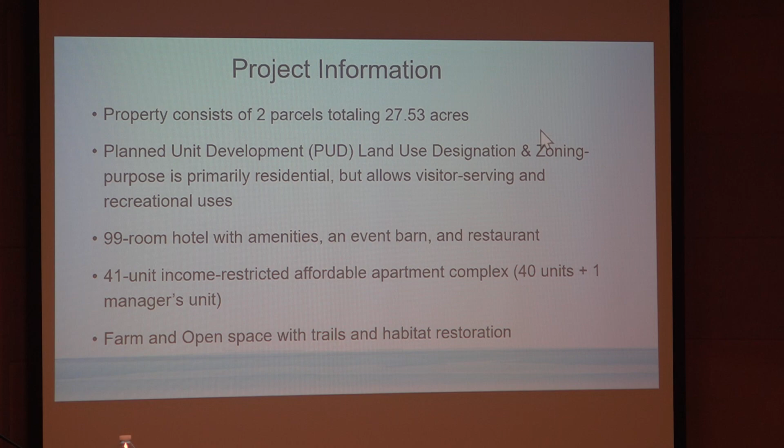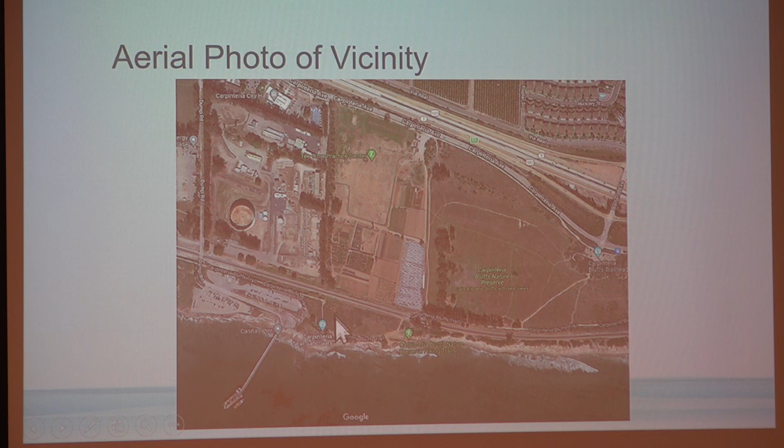Here's the aerial photo of the project site. This is the property right here. It consists of the northern parcel, 23.4 acres, and the southern parcel down here, 4.13 acres. Right here's where Tee Time is currently. These are the agricultural fields back here at the organic farm. Over here is the Chevron property that's in the process of getting permits to go through decommissioning.

Here's City Hall, where we all are right now. Over here is the Bluffs Preserve, and the 101 and Carpinteria Avenue, and obviously the Pacific Ocean.

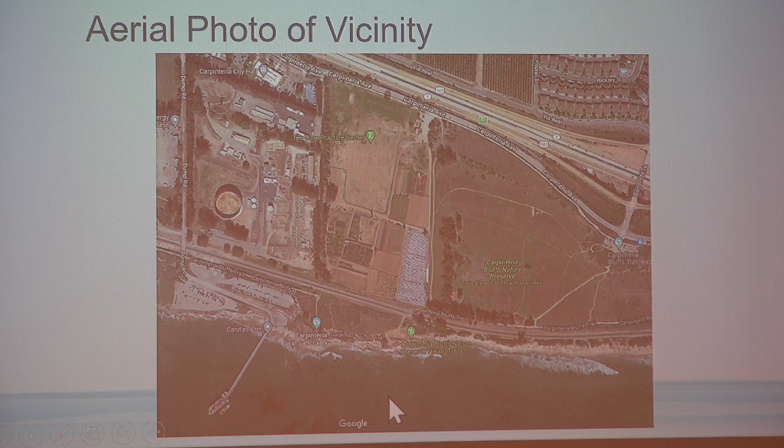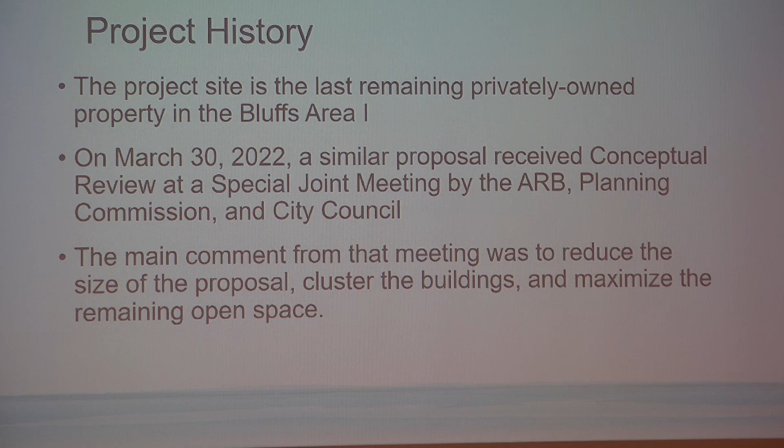So the project history is that this project site is the last remaining privately owned property that's part of the Bluffs 1 area. On March 30th, 2022, a similar proposal received conceptual review at a special joint meeting by the Architectural Review Board, the Planning Commission, and the City Council. At that meeting, the main comment from all the decision makers was to reduce the size of the proposal, cluster the buildings, and maximize the remaining open space.

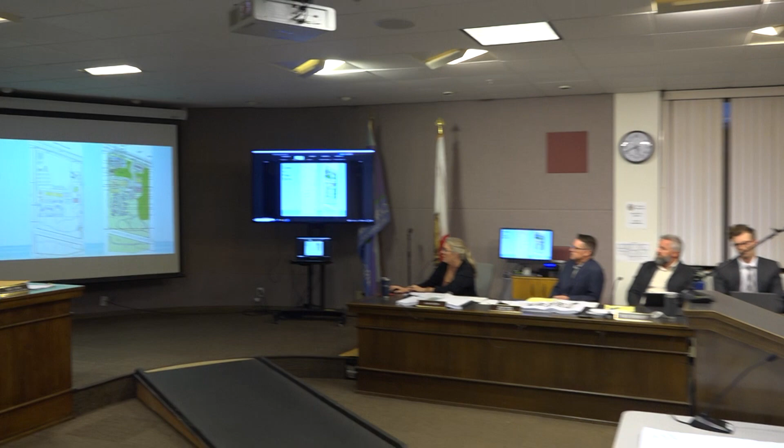So here's a site plan from the concept proposal versus tonight's proposal. This on the left-hand side is the concept proposal, and this is tonight's proposal. This is the hotel resort component here in the conceptual; now the resort component is here. The parking lot used to be here; now the parking lot's here, closer to Carpinteria Avenue.

The residential component was originally 16 units in the first proposal. Now it's 40 units with the manager's unit for a total of 41. The original proposal had a farm here with above-ground parking, and now they've got the farm in this little area, with a subterranean or underground parking garage in this area instead of surface parking up here for the resort. I'll go into more detail on all these components in just a minute, but just for comparison, this is the concept, and this is tonight's proposal.

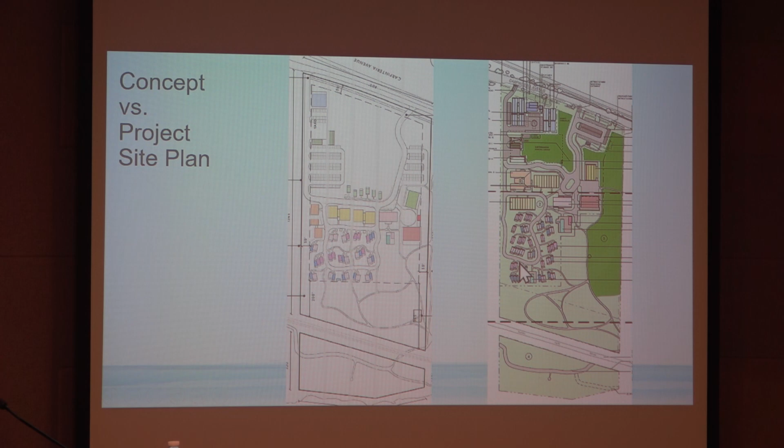And here's the actual project site plan for tonight. I had to turn it the other way to make it big enough to look at. This is the 101 over here and Carpinteria Avenue, so north would be on the right-hand side of the page, and south and the Pacific Ocean are on the left-hand side. So this is the residential component here.

It would be two apartment buildings with a community center, with the manager's unit up above and a little maintenance building here. The apartments would be accessed from Carpinteria Avenue via this access road, which is also the service road for the resort. Here is the underground footprint of the underground parking garage.

This is a barn for the agricultural operations. This is the hotel maintenance building.

And then this is the spa, which will be bermed to appear as one story, with a green roof. And then the two hotel lodges, this one would have 40 rooms, this one would have 39.

Here's the bungalows here. This is the main hotel building, where you go to check in, the concierge and things like that. The swimming pool or the pool cabana. And then this is the restaurant that would be open to the public.

And this is the events barn that would be for resort events, weddings, and special events, and also available to the community, proposed right now at six events per year.

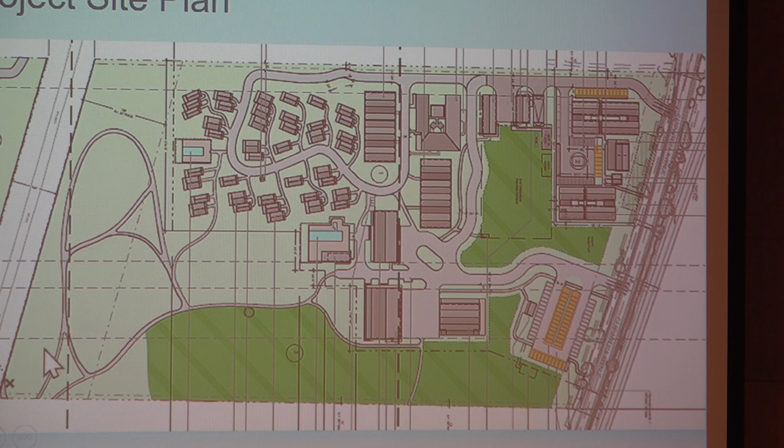It would go through habitat restoration, and then new trails would be added that would connect into the existing trails and the bluffs. And over here, this parcel would relocate and redo the existing trail that runs through the property to be a 20-foot wide, ADA, flat, well-done path with a new seal rookery overlook here with the live stream camera.

And this is part of our open space management plan, this trail. And the benefit of this is, for those of you that know the Bluffs, the trail that runs along there now along the bluff edge is not really accessible for everyone.

It's uneven and there's holes where the erosion happens and whatnot. So it would probably be an improvement for the public to have that nicer trail and allow more people to use it.

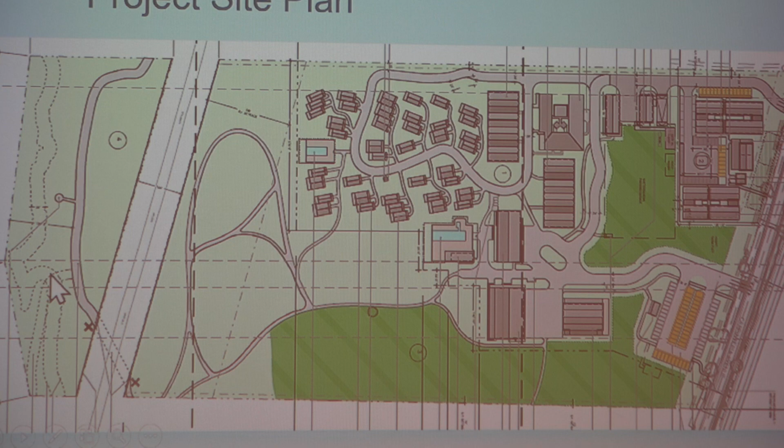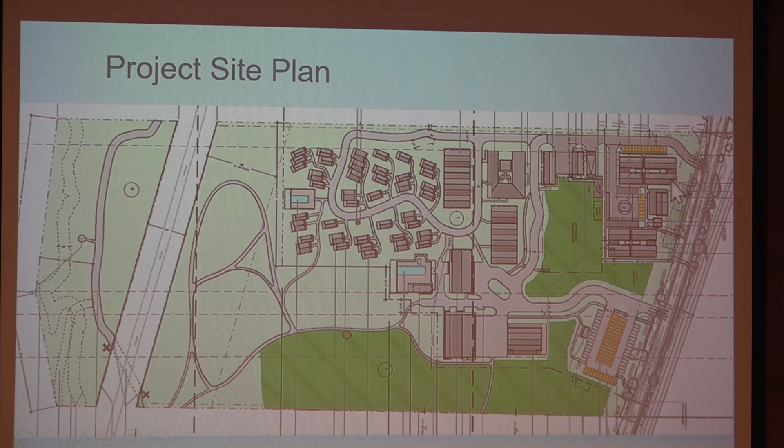Okay, and now we're going to focus in on just the residential. There's going to be that northern part, let me go back real quick. This northern parcel here is going to be subdivided into three separate lots as part of the project.

So this is parcel 1, which would contain the residential component. It's 1.58 acres. The perimeter would probably go about like this here. Like I said earlier, you'd come in off of Carpinteria Avenue.

There would be solar carport canopy covered parking here, and then you would come into the actual complex itself, and there'd be a combination of parallel and regular head-first parking. Again, more solar canopies right here.

There's an apartment building here, and then another apartment building here. These are both two-story apartment buildings. And then this would be the community center on the first floor, and then the second floor would have the manager's unit up above. And then here's that maintenance building.

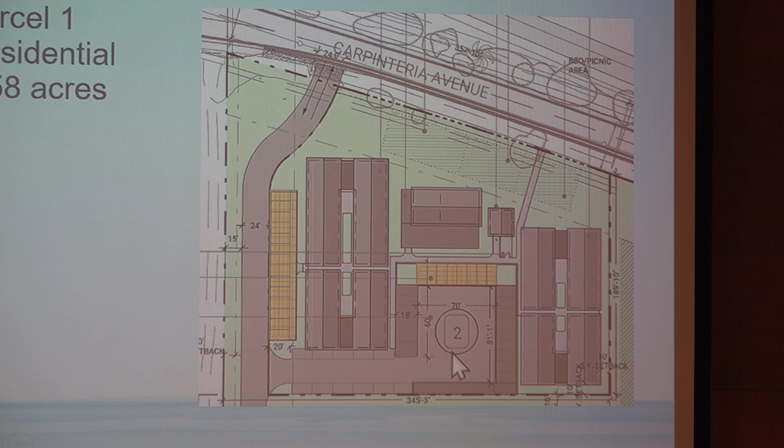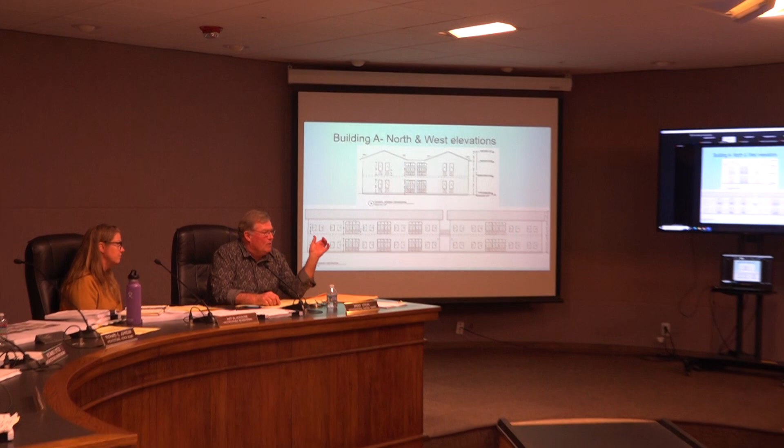Excuse me, Cindy. The parking over here, we have blocked for any kind of sheriff's access, anybody parked out here is going to be towed, so we need to clear away. Got a lot of people here tonight, and if we'd known this, we probably would have had it at the middle school or the high school. Backside of the park. So does anybody in here or outside, if you're parked in the back, it's going to be towed. You're going to need to move your cars. It's not a ticket, it's a tow.

Can we open these blinds over here? There's a bunch of people over here that can't see, and they'd like to. If we could open the blinds please. Sure, the hallway's full, thank you. Go ahead and open the blinds, whoever's over there. So anyway, I'm sorry, Cindy, to do that, but I'd rather have people forewarned than parking illegally. There we go. Thank you, oh there's a little door for the bathroom. Yeah, you can even open that sliding glass door if you want, let some fresh air in. There we go. Thank you, okay Cindy, sorry for the interruption, but I know we're gonna get tickets or towed. We don't want that.

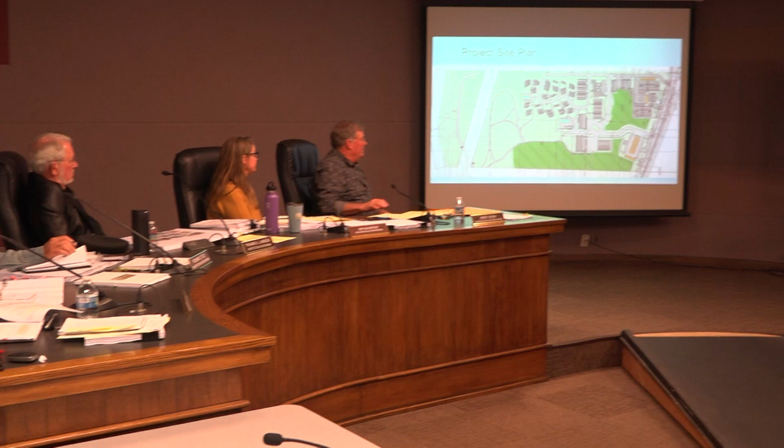Okay, so back to where I was. This is the residential component of the project.

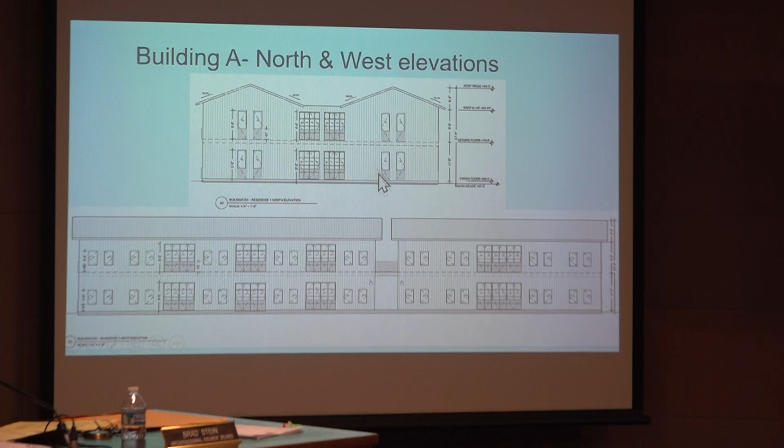So this is building A, the westernmost apartment building. I didn't do all the floor plans and elevations like I normally do, just focused on public views this time to keep this short with all 47 slides. This is the north elevation, the Carpinteria Avenue side of the westernmost apartment building. And this is the western elevation, the side the skate park would look at.

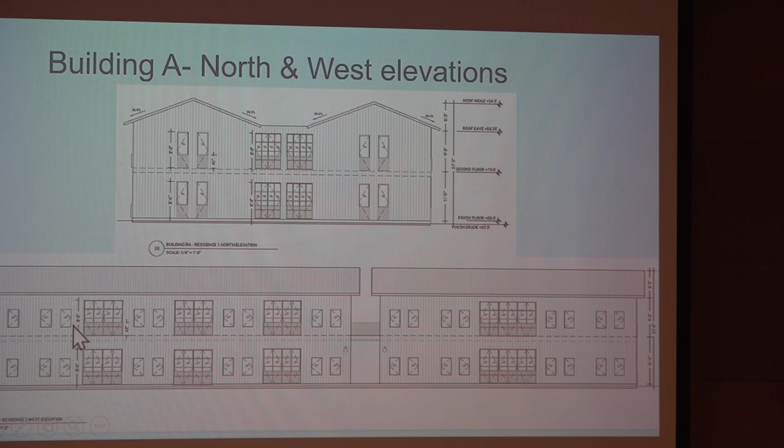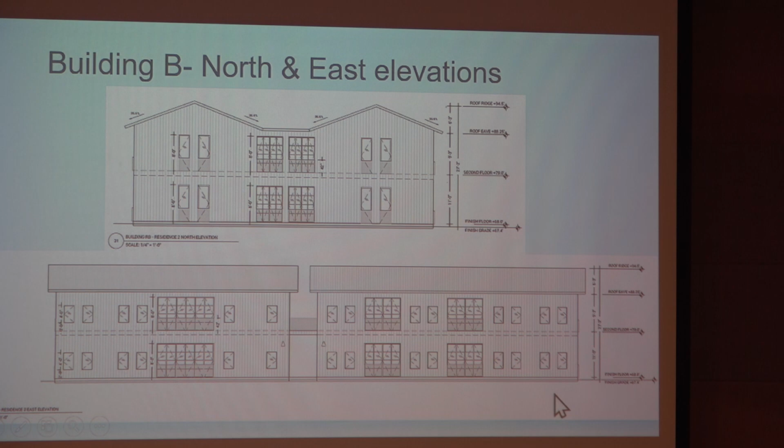And then this is the community center and manager's unit. I actually realized today the plans are mislabeled - this is actually the north elevation, even though it's labeled south. But this is what you'd see from Carpinteria Avenue, and there's the little deck for the manager's unit up above, on the west side of the structure.

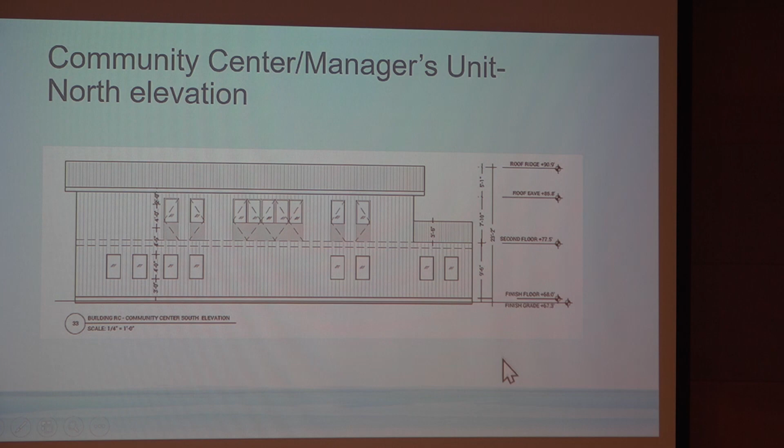And here's that little maintenance building, and here's the solar canopy carports. They're only 8.5 feet tall, so not really large like we've seen on other projects. The angle is very gentle too, not very steep, as you can see from the elevation - a very slow, shallow pitch.

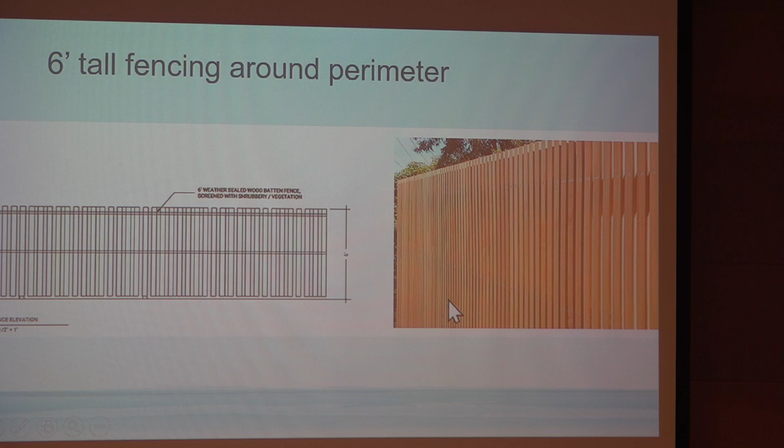And then around the perimeter, including along Carpinteria Avenue, they're proposing a 6-foot tall vertical picket fence, which would look like this, with some landscaping as well. This is going to be around the whole perimeter of the residential structure, so it would go all around here, with a gate or something here, obviously, and not there.

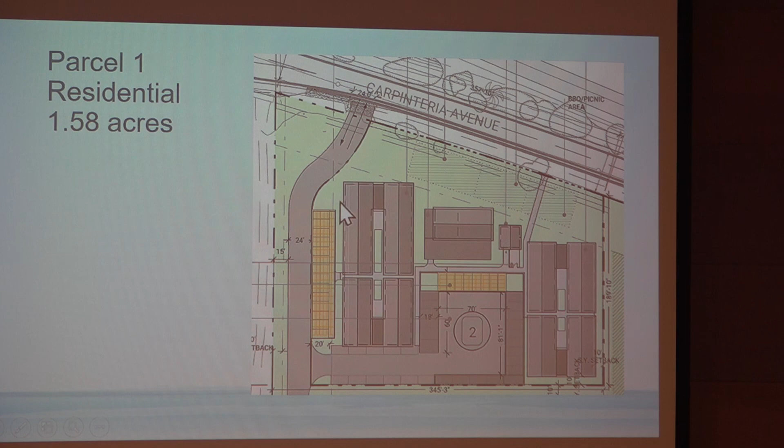Okay, and then parcel 2 would be 12.32 acres.

And the main entrance to the resort would be here on Carpinteria Avenue. For reference, right now the entrance to Tee Time is over here, so it's just a little further west than the existing driveway to the Tee Time parking lot. You come in, and then you would be here to this parking lot with 68 spaces, I believe.

And again, 3 sections of them would have the solar canopy carports, just like the ones over in the residential area, 8.5 feet tall. And the little farm stand would be here.

You continue up - this is the event barn. Here's the restaurant, so you would park and then walk. And if you needed help, they would have little electric cars, shuttles for people.

And then this is the main hotel building, where your check-in, concierge, that sort of thing would be. Here's the 2-story lodge, the front one, which would have 40 rooms. Here's the spa again, here's the second lodge, also 2-story with 39 rooms - one of the rooms is a staff break room, that's why it doesn't have 40.

And then the hotel maintenance building, and again the farm maintenance building. And this is the gray water treatment - it's like a shed, is what this is here. So those are just outbuildings for the agricultural purposes.

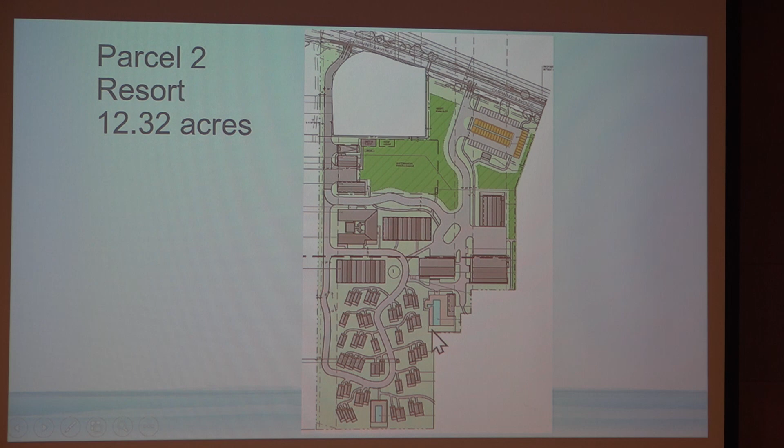And then here's the bungalows, and the pool cabana, and this is the adult pool, which is just a pool. And both of these are also fenced with the 5-foot tall vertical picket, just 5 feet instead of 6 feet like along Carpinteria Avenue and around the perimeter. And this would have a fence too, because it's a pool.

Okay, so here's the parking lot. You see it's going to be landscaped to screen it from Carpinteria Avenue.

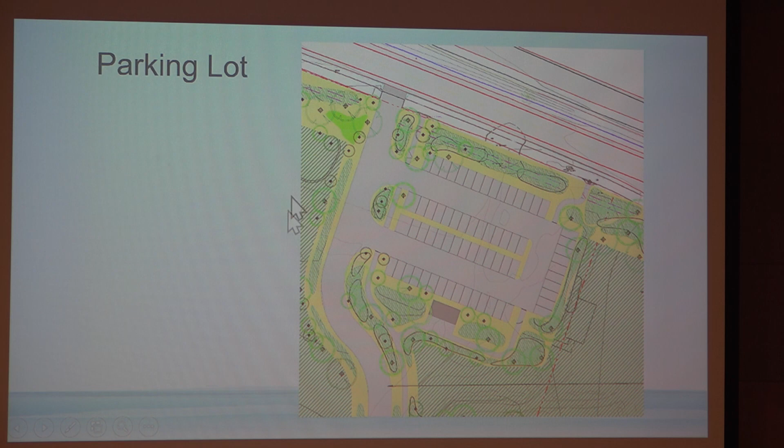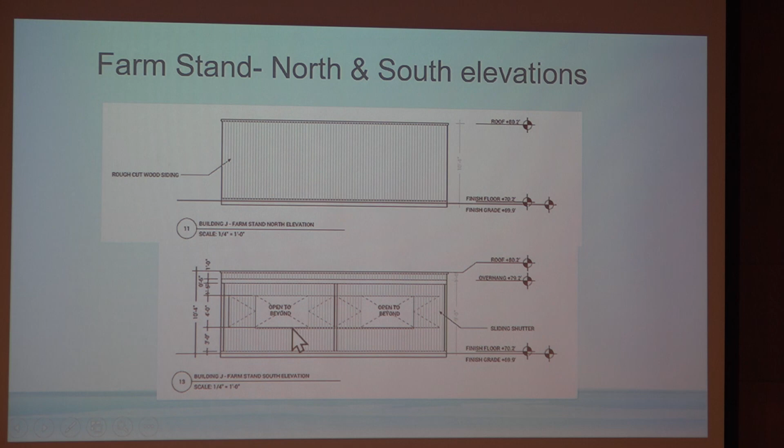And then here's a little farm stand. This is the north elevation of the farm stand, so facing the parking lot or Carpinteria Avenue is just the back of it. The front of it, which would face south towards the ocean and the events building and whatnot, is where you would walk up and buy whatever produce.

And then here's the events barn. The maximum height is 24.5 feet. It's a single-story building, but it's got the high-pitched roof. And then this is a little covered, trellis-covered porch over here.

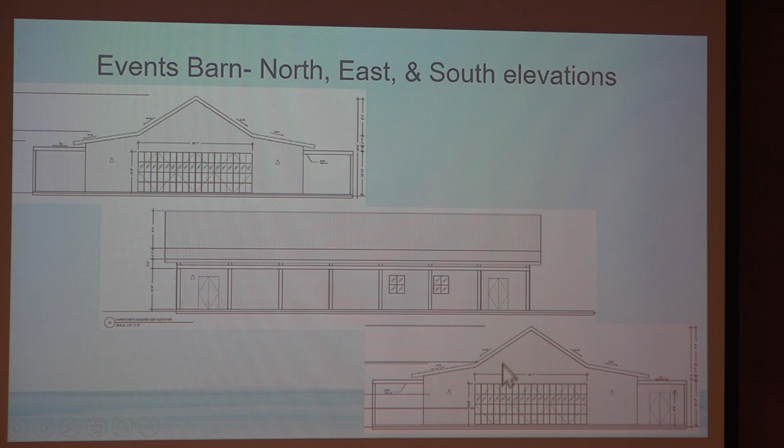So this is the north elevation, which is what you would see from Carpinteria Avenue. This is the east elevation, what you'd see from the Bluffs Preserve. And then the south elevation - from the 4 acres, the trails on the 4 acres and whatnot, is what you would see here.

And then the restaurant building, again, the north elevation, that's what you would see from Carpinteria Avenue. The east elevation is what you would see from the Bluffs Preserve. And the south elevation is what you would see from the Bluffs Trail.

The main hotel building, the north and south. So here's the north elevation, Carpinteria Avenue. And then here's the south elevation, which would be from the Bluffs Trail.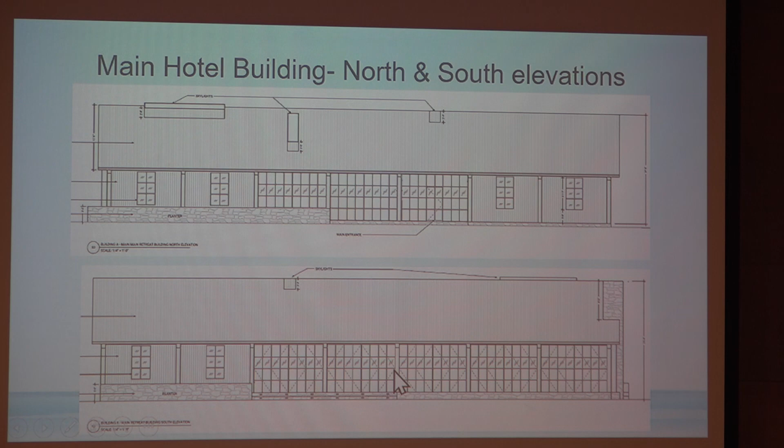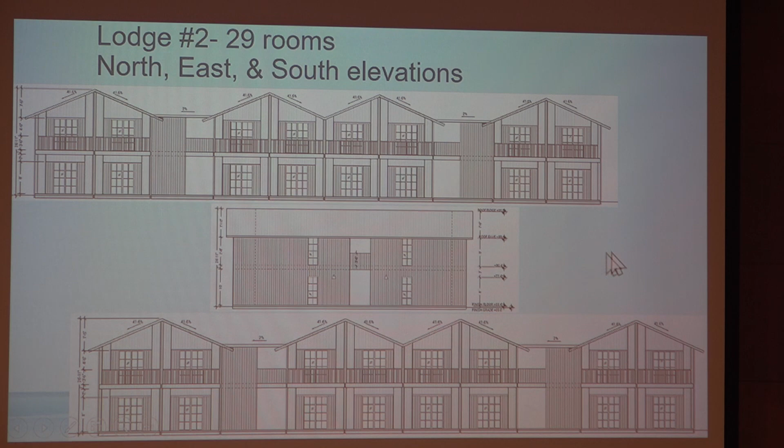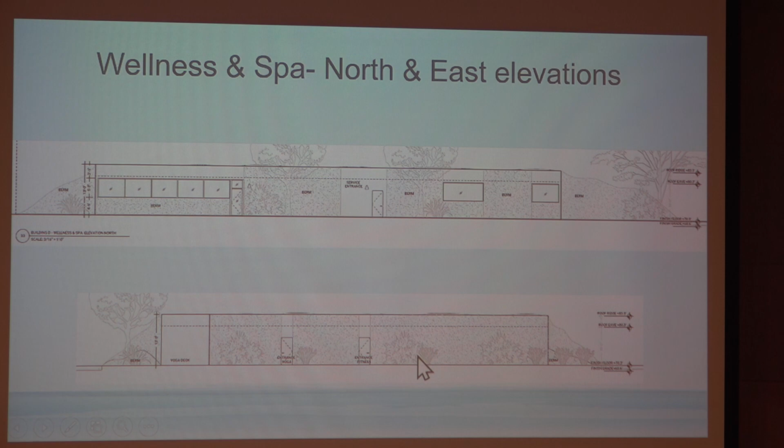So this is the north elevation that you would see from Carpinteria Avenue, but this would be behind the residential buildings. And then this is the east elevation that you would see bits and pieces of from the bluff trails, or from the preserve trails.

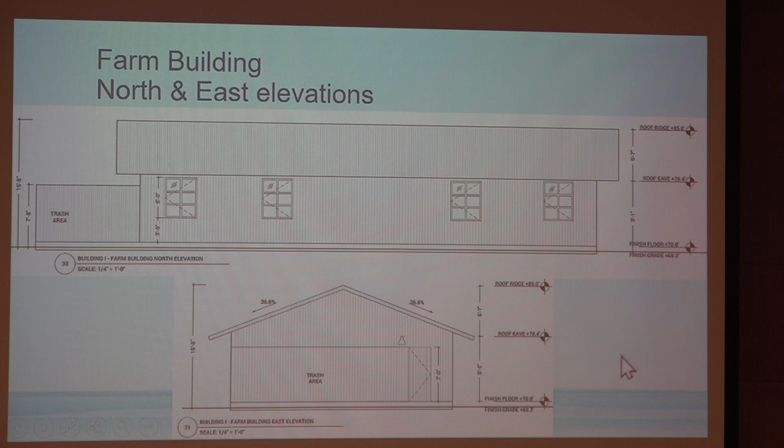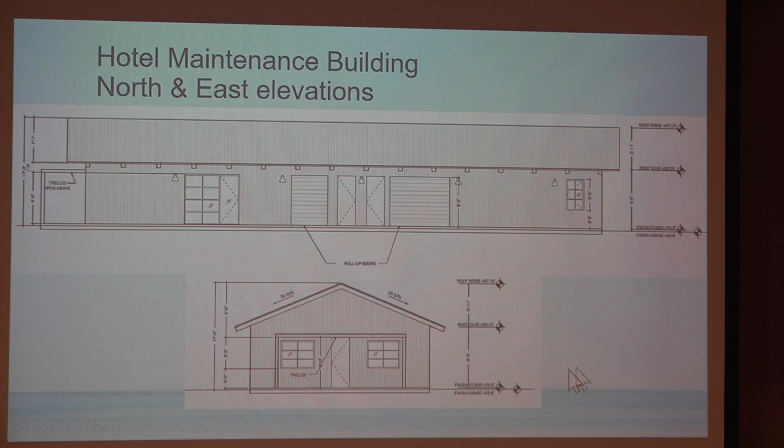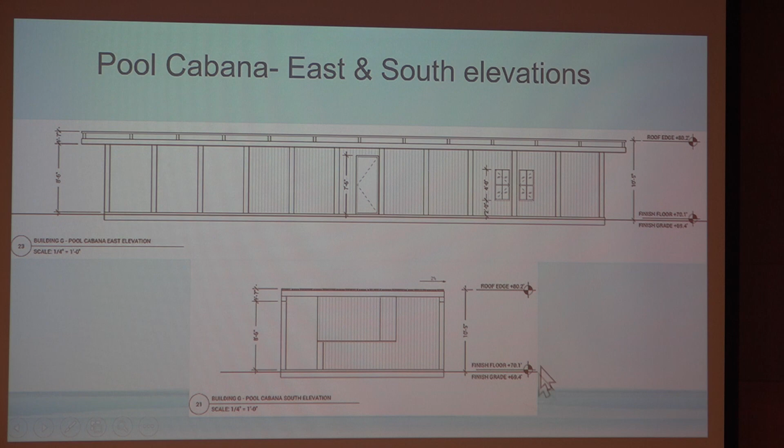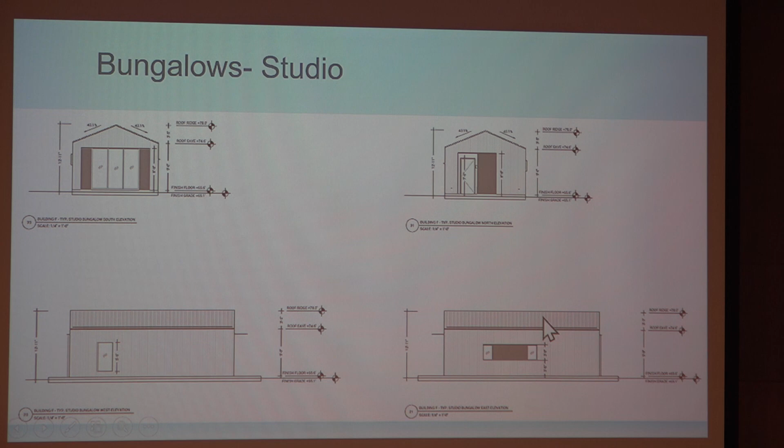And then here's the bungalows. There's 4 different kinds: studios, deluxe studios, 2 bedrooms and 3 bedrooms. They're scattered in that little area. What the story poles represent is the perimeter of that cluster of bungalows. So here's the studios. All the bungalows are 12 feet 11 inches or 13 feet tall. So they're very low in height.

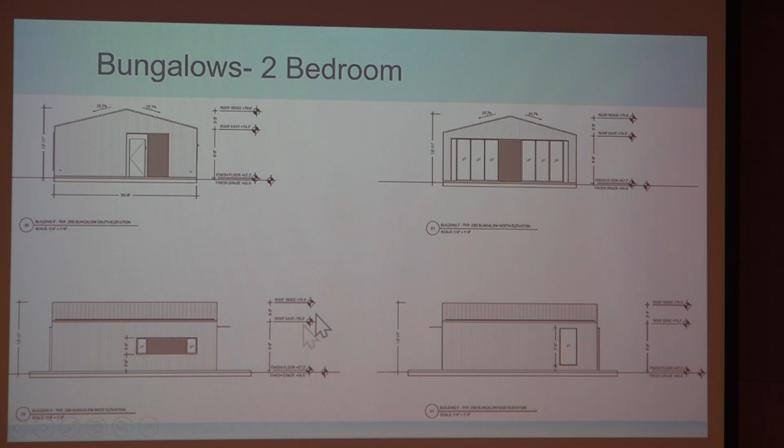And here's the deluxe studio, a little bit bigger. And then the 2 bedroom. And then this is the 3 bedroom, which appears to be a 2 bedroom with a studio with connecting doors, but I'm not sure if they're going to construct it like that or not, but that's how the floor plan looks.

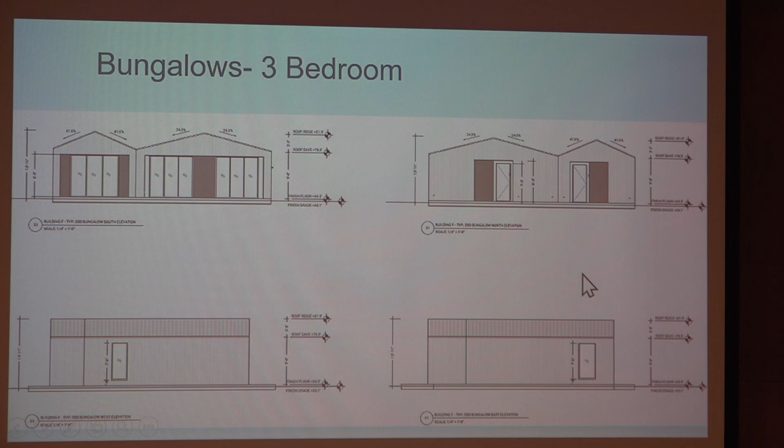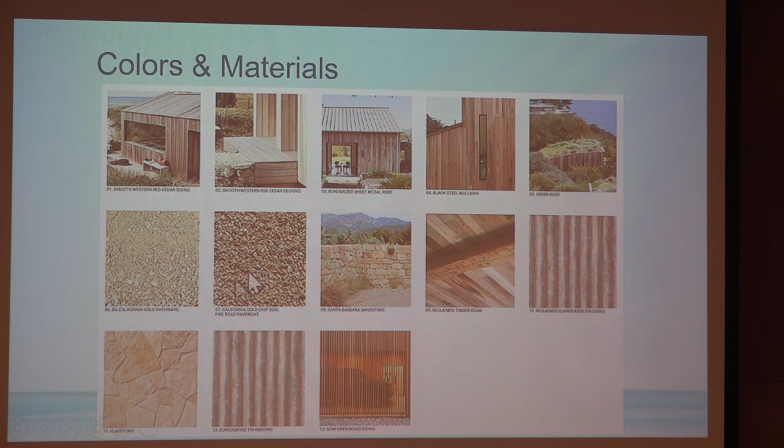Then these are the proposed colors and materials for the whole development, which are very organic, using cedar siding, metal roofs, Santa Barbara stone, reclaimed wood where they can, and flagstone, and the yellow gravel that's popular, I can't remember the name. Yeah, California Gold, yeah.

And then here's the exterior light fixtures. Just preliminary feedback on these from you guys would be nice tonight. They're in your plans. I'm not going to go into great detail on these.

Some are along the pathways within the resort. There's no lighting on the paths in the open space section. And then some hanging from the trees. Step lights, obviously, for safety. There's some landscaping pathway lights. The bungalows have these by their doors for their exterior lights.

These little strip lights are in the pool cabana at the bar. And then the most common exterior light fixture for the whole development is this little light right here for exterior light. There's some can lights.

And then in the events building, on their little covered, trellis covered patio, and in the farm stand, they do have these lights proposed, these little festoon lights, which do not appear to technically be night sky friendly because you can see the light bulb from the side.

But those are the only ones I thought were potentially problematic, and I don't know, in the future, maybe they could be conditioned to just be turned off by 9:30 at night or something, so that they were not a problem, as long as it goes through CEQA and the biologists don't have a problem with that.

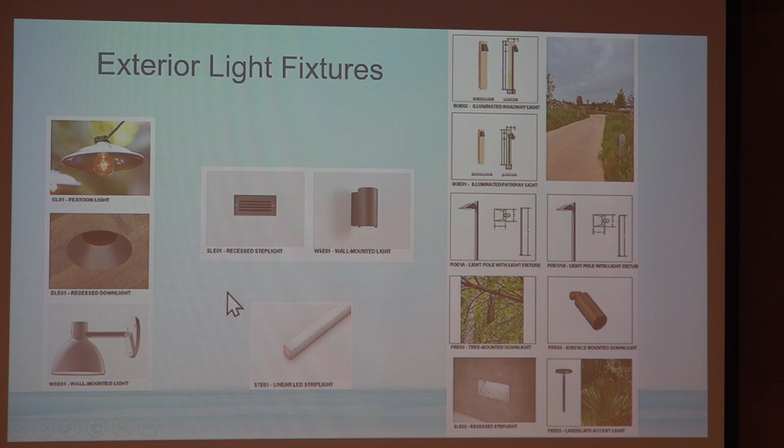And then this is parcel 3, the farm in the open space. It's 9.47 acres, right here. So this is the remainder of the parcel.

So this darker green, as we talked about before, is agricultural cropland, crops, row crops. And then this light green would be the restored habitat areas, and the gray are the proposed trails. These trails would tie into the resort, trails that go through the resort, and then they would also tie into the Bluffs Preserve trails.

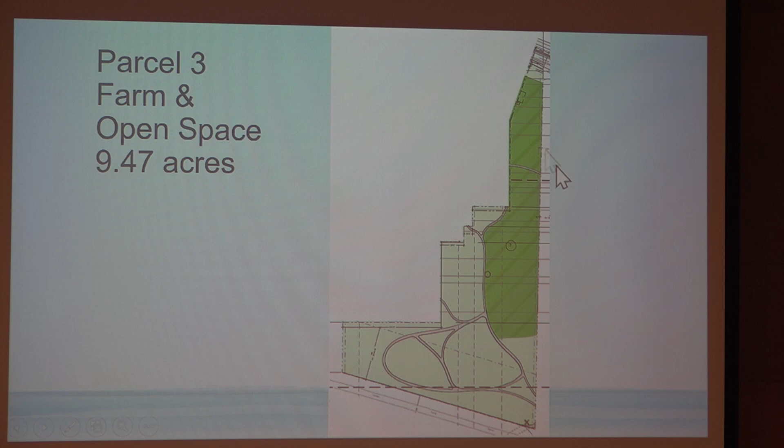And then the railroad crossing would be here, to cross over to the southern parcel, which is right here. So you cross over here. The railroad crossing right now is proposed where the existing informal crossing is, and that will get sorted out as the project moves forward through CEQA and whatnot.

But this is the 4 acres, and this is that new 20-foot wide accessible trail with the new seal overlook. And like I mentioned before, it'll have a live streaming camera for the rookery. And then habitat restoration here - there's a bunch of pampas grass that'll be removed, and then other habitat restoration.

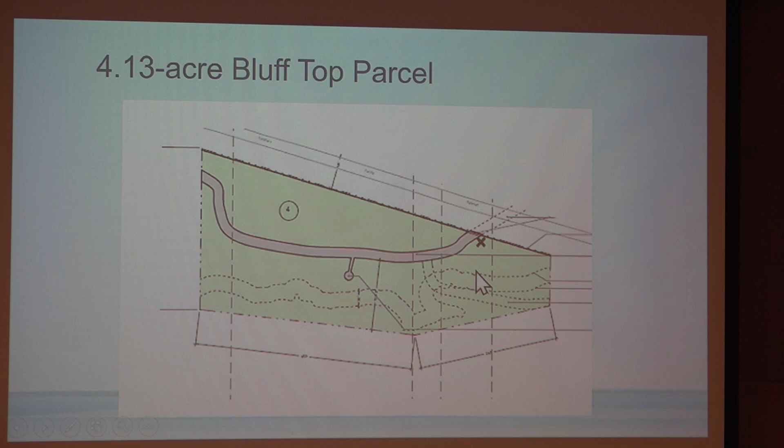And I'm going to take a drink because I'm thirsty.

All right, so overall the site grading, they're proposing 47,000 cubic yards of cut and 47,000 cubic yards of fill, and want to balance it on site.

So this drawing shows the cut and the fill areas. Cut is when you take soil away, for people listening - that's when you cut soil out or take it out of the ground. Fill is when you put soil on the ground. So the red areas show the cut areas, and the darker the red, the deeper the cut, basically.

So right here where it's really red, this is where they're digging down to do the swimming pools. And then this is the subterranean garage. So right here would be the deepest part that they would dig. The pink is less - that's like a foot to 4 feet of taking the dirt.

So the ridge of the property is like right in here now. So this part here would get smoothed out flat, and then dirt soil would be added down here on this part, and then also on top of the subterranean garage.

So these darker purple areas are where the fill's deeper, and the lighter purple is where it's shallower. So this could be like 2 feet, and over here it could be like 10 feet where it's really dark, where these berms are around the spa - it's like 12 to 13 feet.

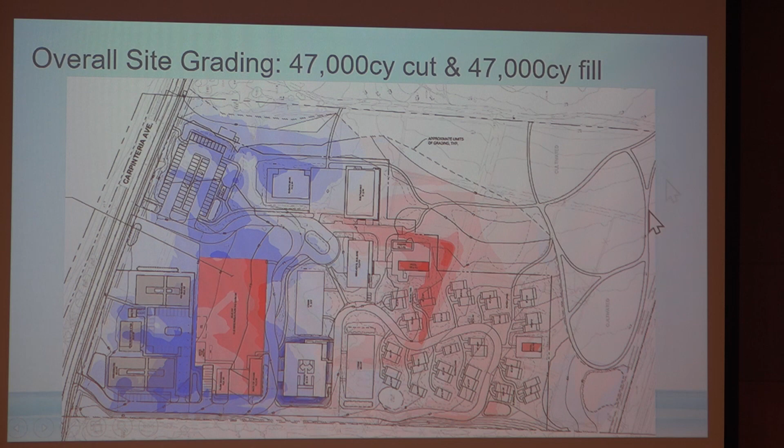So this is just showing how the dirt's going to be. It's going to be basically taken from here and excavated from here, and then spread over here to build the pads for the residential structures, and then for the main hotel structures that are in this area.

And then the landscaping, restoration, and tree removal component of the project - there's 108 trees that would be removed. Most of them are along this property line right here, which is the property line between City Hall and where the skate park is and the Tee Time property. That is the western windrow, mostly tamarisks and some eucalyptus, proposed to be removed from along this area. Other trees around the site will be removed.

A couple here - the sycamores along Carpinteria Avenue are proposed to remain. The palm tree at the top of the ridge, that is going to be removed. And the cypress over here is going to be removed. The cute little cypress that looks like a Christmas tree will remain. And then some other ones along here.

And then no tree removal down here on the 4 acres, 4.13 acres on the bluff.

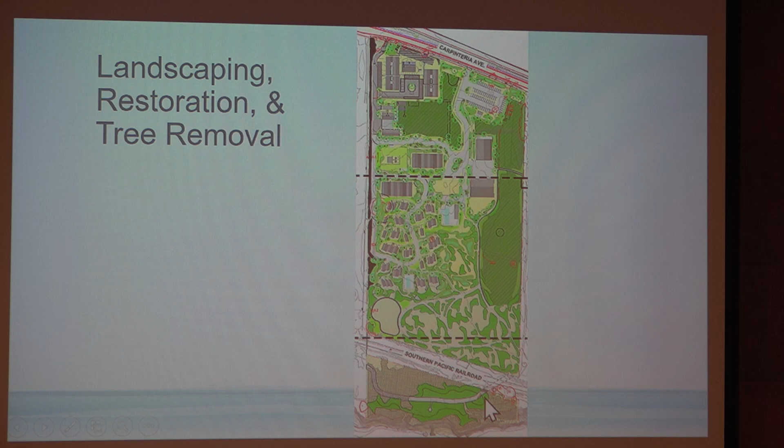And then that western windrow, when it's removed, they're proposing to replace it with a native hedgerow. Those native hedgerow plants are oak trees, toyon, coffeeberry, hollyleaf cherry trees, and other bushes, coyote bush. So the palette for that, although native, doesn't quite have that vertical element or the height that the existing windrow has now, so that would be something different and less of a view blocker.

And then here's the story poles. Okay, so this is looking west at the residential component, the apartments right here. And then on the other side of those trees, that's like the skate park.

And then here's looking southwest, a little bit closer to where the little office is for Tee Time. Looking southwest at the resort structures.

So this would be the main hotel building here, and then these two taller ones you see would be the two lodges with the hotel rooms. And then this is the spa over here, so just imagine dirt being built up like that. And then in the back, if you squint, you can see the little bungalows in here, although from this view they would not be visible because they'd be blocked by other structures.

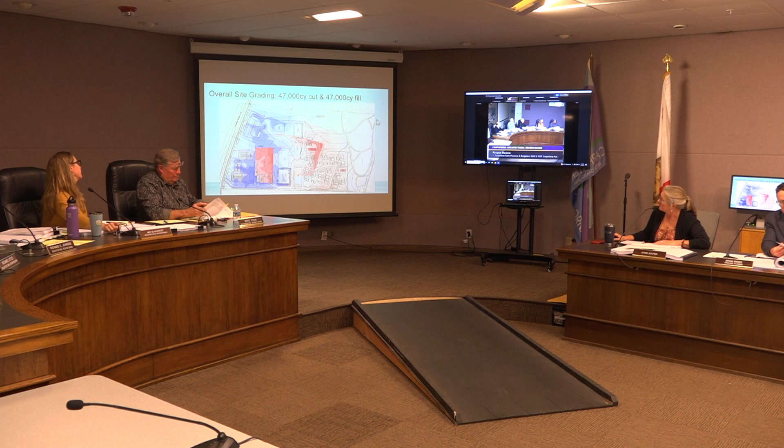So this is only, the railroad tracks are here, so you still have the whole 4 acres over here. It's also on page C400 of the plans if you want to look in your plan set. And then you can see the other side, and you can visually see that it's about half of the site when you look at the 4.13 with the remainder of the balance.

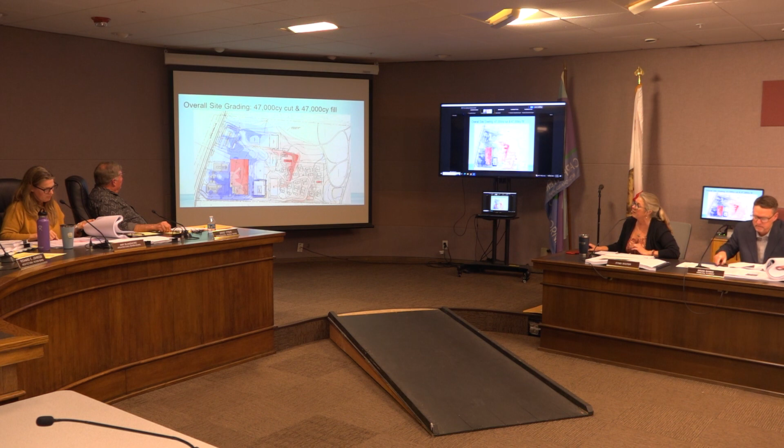Thank you. You're welcome.

Yes, go ahead, Patrick. Yeah, hi, Cindy.

Several questions regarding the lot and building coverage statistics in the report. There are 3 different stats called out: the introduction refers to 121,000 some odd square feet, the code table for lot coverage refers to 23,000, and if you add up all the structures on the second table, it's 174,000. Just a little clarification on those different stats.

Clearly they're different references. So, to the calculations: the 121,411 that you're referring to, that is just the floor area of the resort structures only. And then the other one you were asking for...

For the lot coverage, it calls out 23,000 - that would be the footprint of just the residential structures, because that's the building coverage, which only applies to residential structures. So it's 30% maximum for dwelling units. That 23,394 square feet would be the footprint of the residential structure, not the floor area footprint - so just what's touching the ground, not both stories combined.

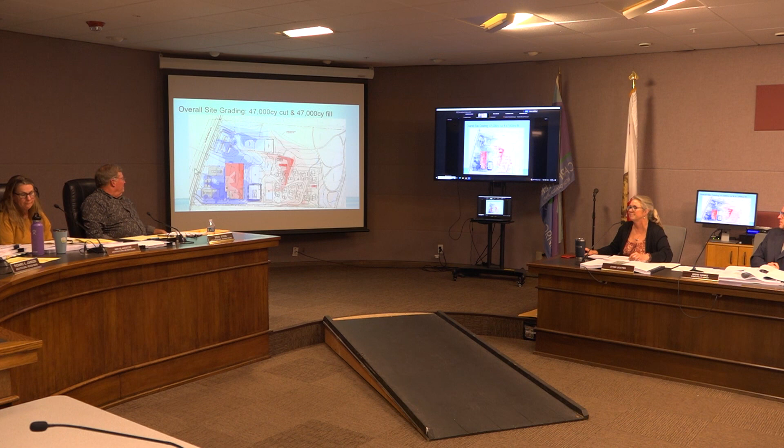Anyone else? Okay, one clarification I had too, and I read it in the staff report - after the cut and fill, for some of the buildings, especially closer to Carpinteria Avenue, is the actual height not going to be correct with the story poles, or are the story poles exact?

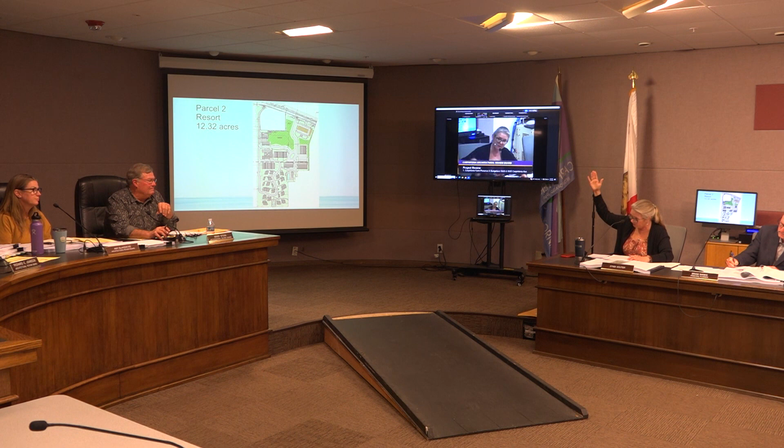The story poles include the fill. Okay. Yeah, that's why the residential structures, when you walk along Carpinteria Avenue, look really tall - it's the 10 foot of fill plus the 27 foot to the ridge. Yeah, okay, thank you.

Okay, at this time I'm going to ask the applicant to come up.